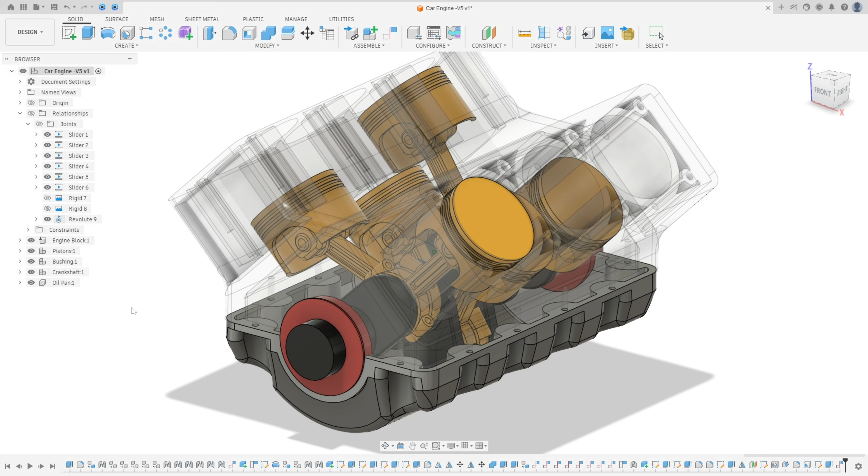Let's create one more component of the car engine series. In this tutorial, you'll learn to make the oil pan.

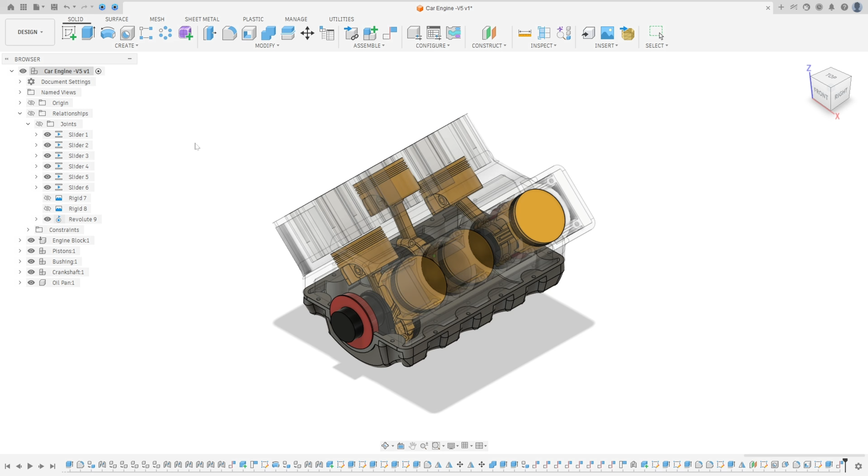The first step, go to assembly, select new component, and the parent is the car engine, and the component name is oil pan, and select activate and press OK. Hide the other components and make sure that the oil pan is activated.

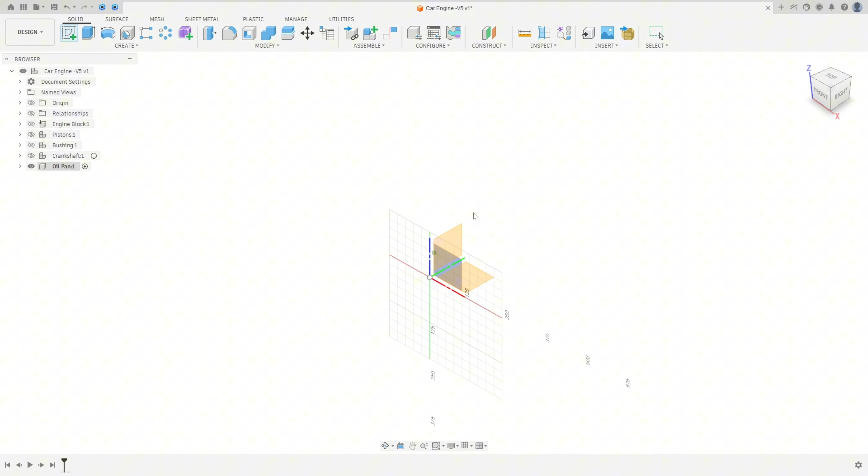Go to create a sketch, select the top plane and select the center rectangle, click here at the midpoint, make a rectangle here with 508 millimeters by 330.2 millimeters and press OK. Let me move the dimensions here a little bit and finish the sketch.

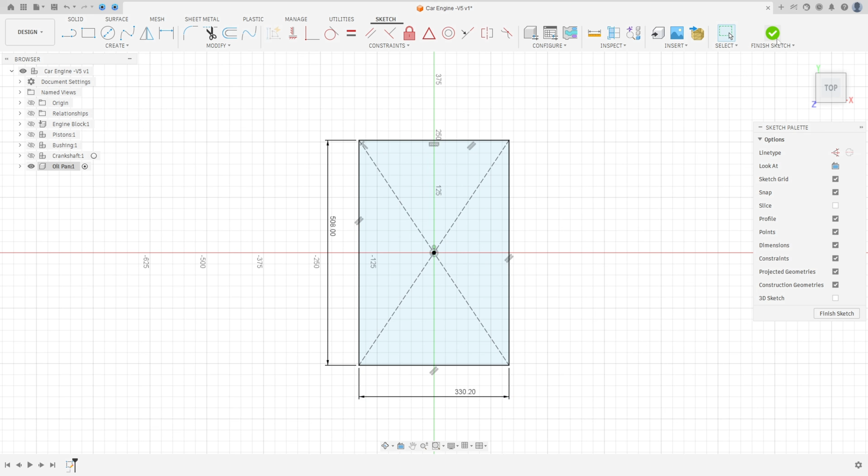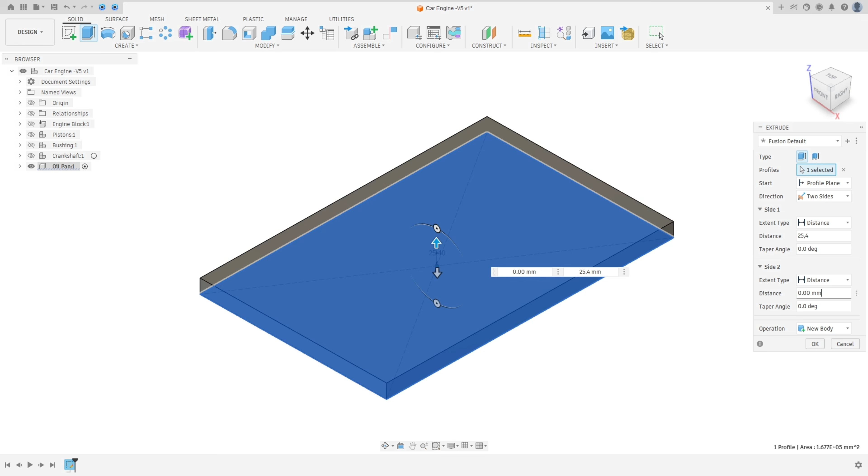Now go to extrude and select this profile, and the direction here, select two sides. Side one we will extrude 25.4 millimeters, and side two the distance will be 101.6, and we will add a taper angle of -15 degrees. Operation new body and press OK. We made this one.

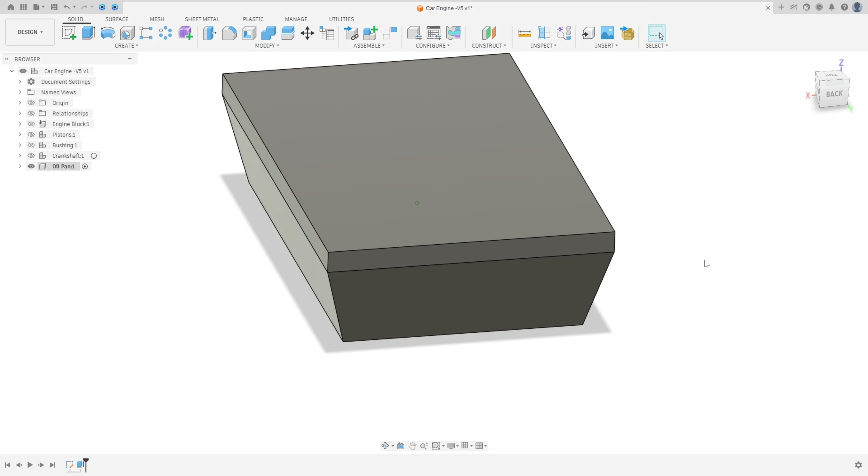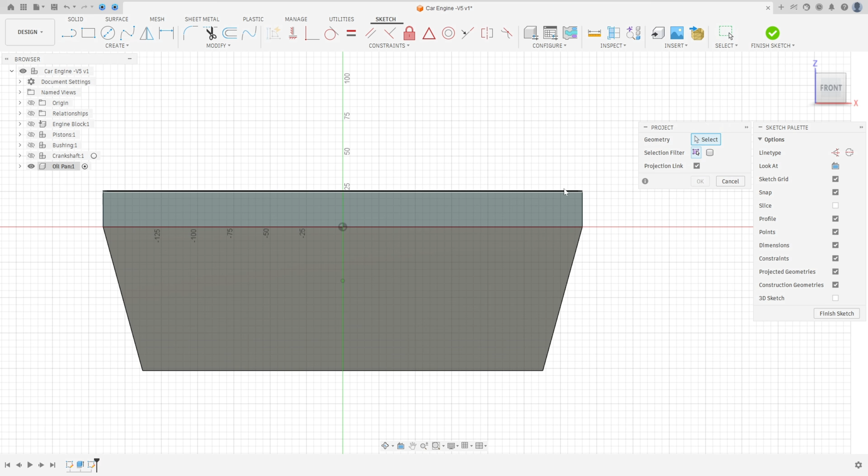Now go to create a sketch and select the front face here. Go to create and select project/include and project, or just press letter P on the keyboard. In the selection filter, select body, select this body here and press OK.

Go to create, select the arc, center point arc, and find the center of this line. Let me hide this body a little bit to show you. When you find the center, you will see this triangle here. Make an arc here with 127 millimeters of radius.

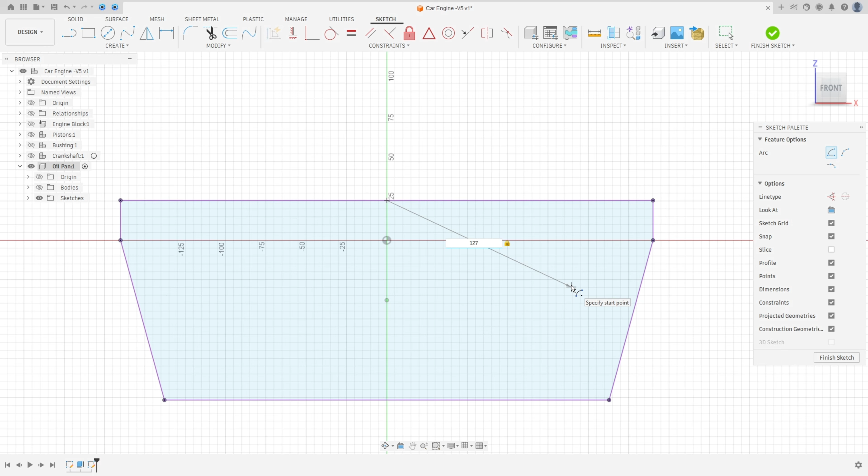Go to constraints and select horizontal/vertical. Select this point and this point here. Select line, click at this point, make a line here and make another line here. And go to sketch dimension.

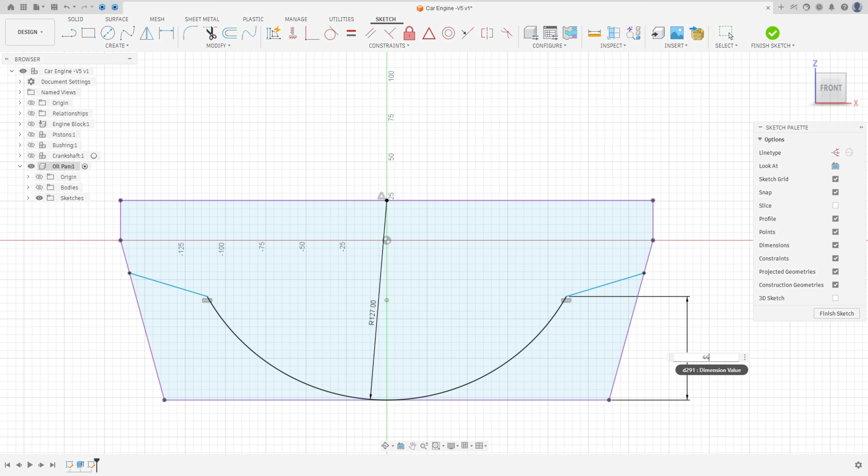The distance between this point and this line here is 44.45 millimeters. And the angle between this line here and this one is 20 degrees. Go to constraints, select equal, select this line here and this one.

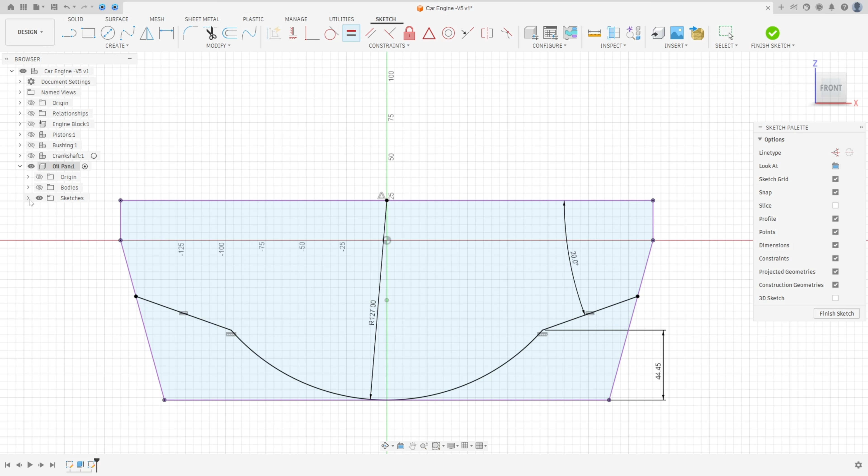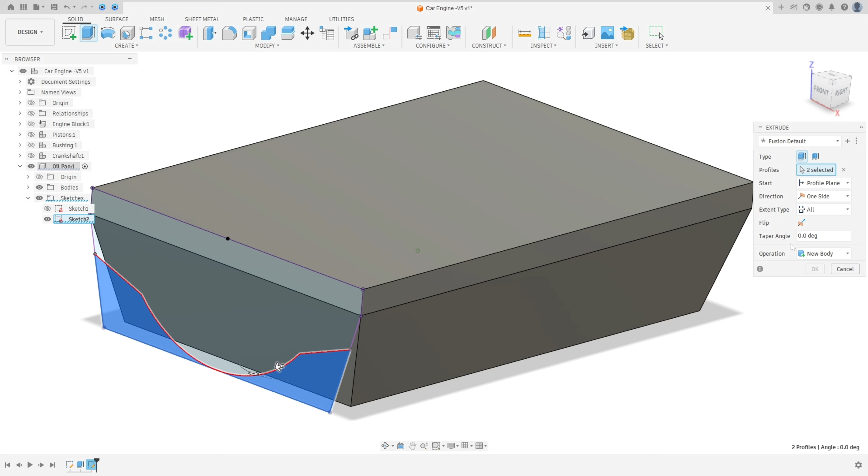Finish the sketch. Show the body here and go to extrude, select this area and this area. We use this profile to make a cut, and the extent type here, select all, flip the direction, the operation is cut, and press OK.

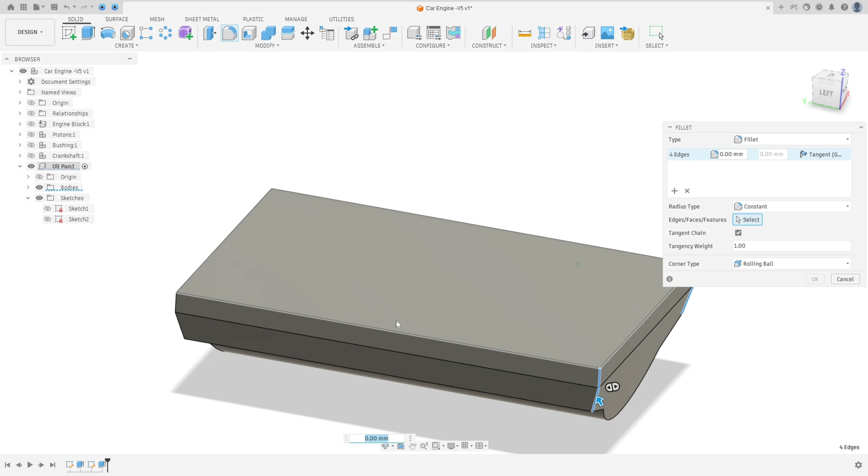Now go to fillet and select this edge here, this edge, and move this a little bit here. Select this edge here and this edge. The fillet here is 25.4 millimeters and press OK.

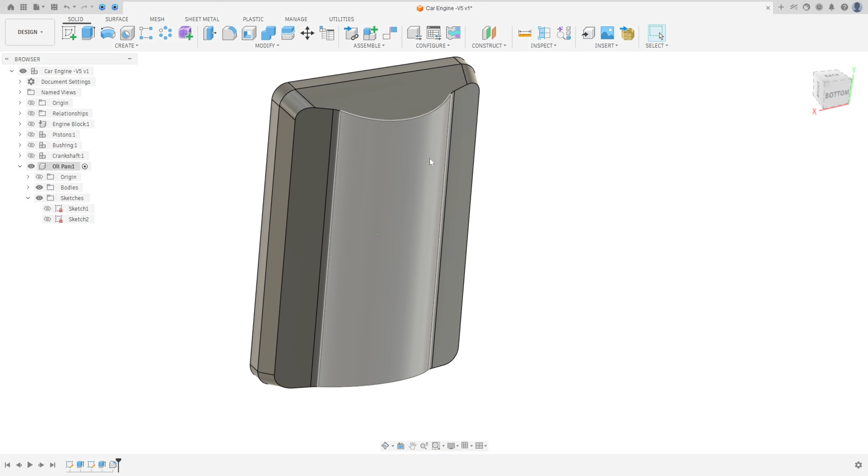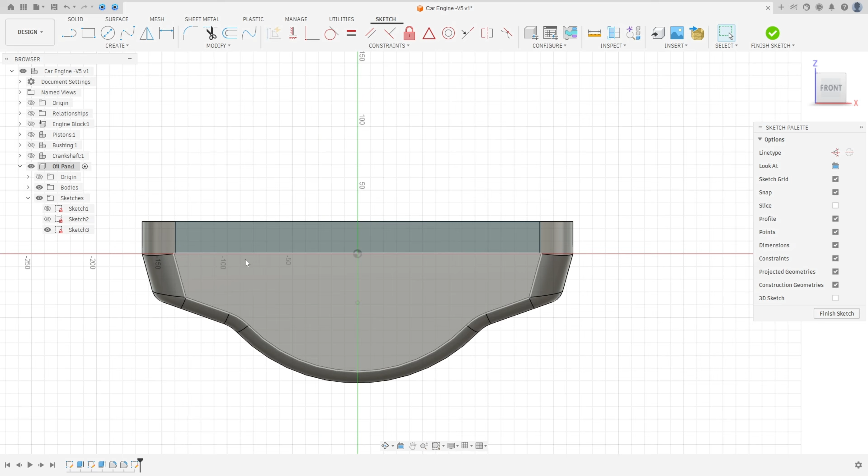Now go to fillet again and select this edge, and the fillet here is 12.7 millimeters and press OK. Now go to create a sketch again and select the front plane, and press letter P on the keyboard to make a project. Selection filter body, select this body here and press OK.

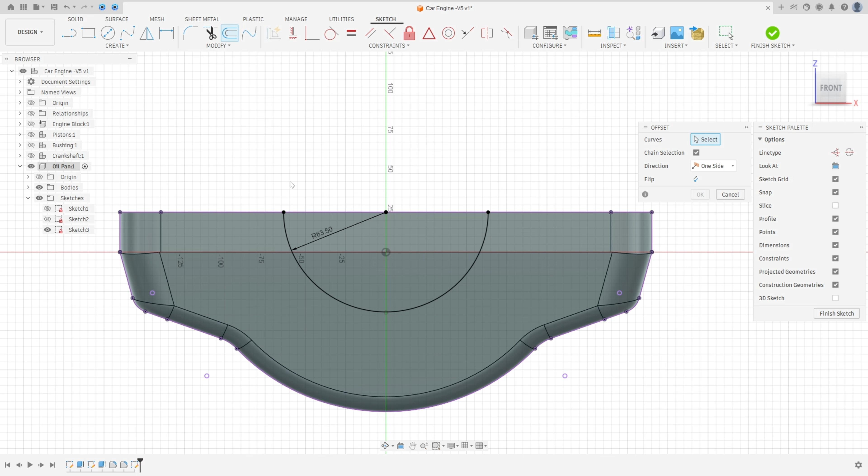Select center point arc. Click here at the center of this line. Make an arc here with 63.5 millimeters of radius, click here on this line and click on the line on the other side. Now go to modify, offset, and select this arc here. Make an offset of 12.7 millimeters and press OK.

Make sure that this point is coincident with this line or horizontal with this point, and the same for this point here, okay? So go to constraint, select horizontal/vertical, select this point and this point here. Or go to constraint, select coincident, select this point and this line here. We made this profile. The dimensions are here.

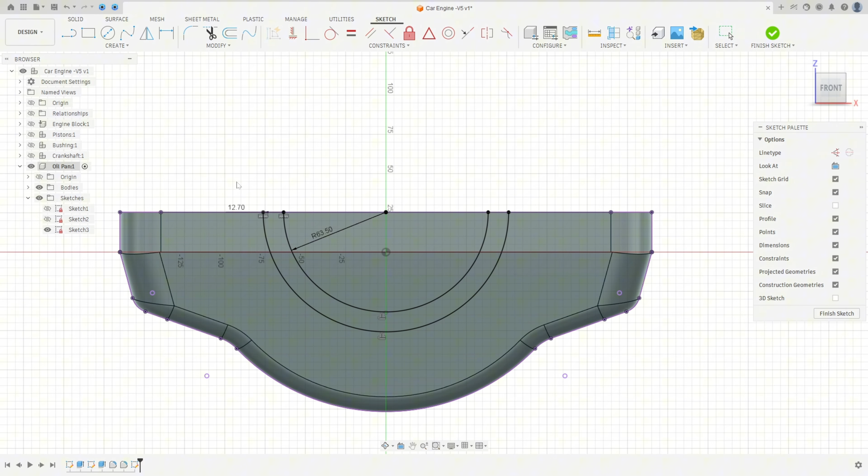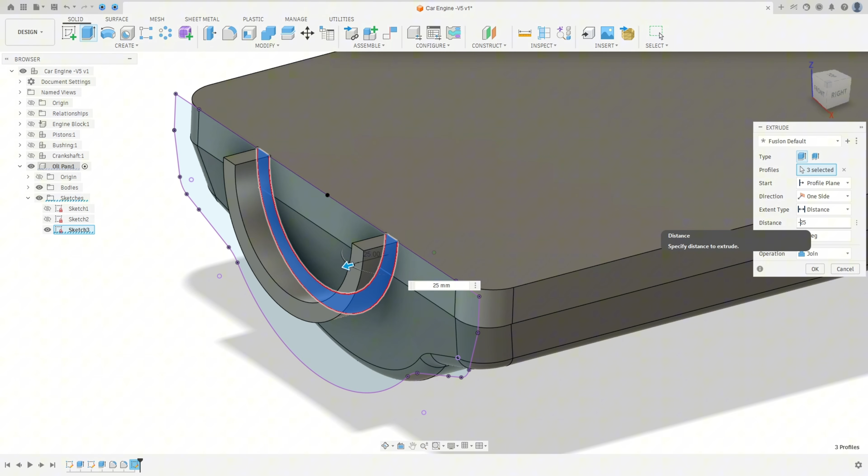Finish the sketch. Go to extrude. Here we will select this profile, and we will make an extrusion with 25 millimeters, but flip the direction, put a minus here. The operation here is join. We will create this area here. Press OK.

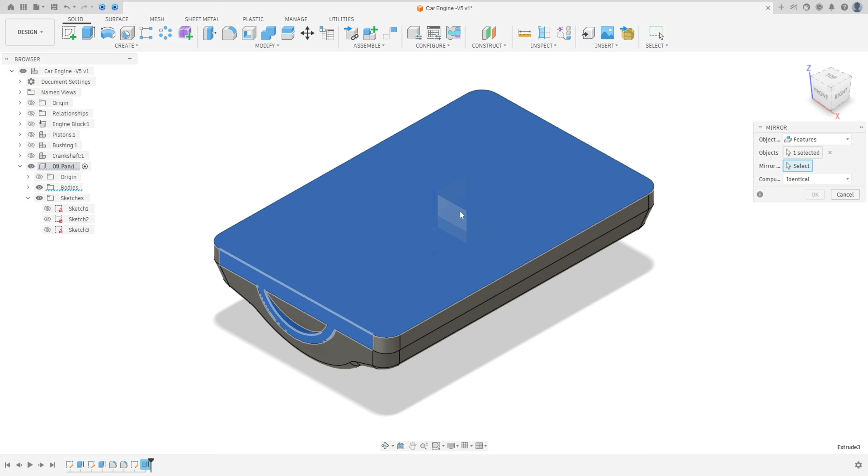Now we need to create the same on the other side. To create this, go to create and select mirror. The object type, select features. The object, select the last extrude. And the mirror plane, select the front plane. And press OK.

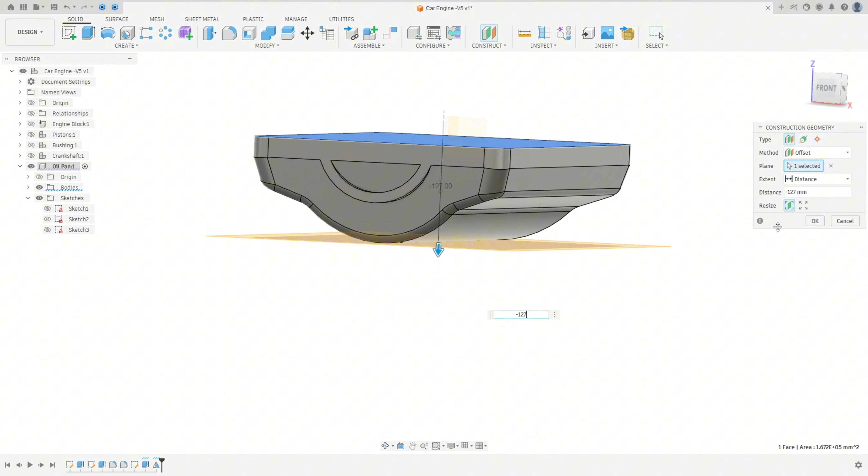And now go to construct and select offset plane. And the plane, select the top face here. And the distance is minus 127 millimeters. And press OK. And go to create a sketch. Select this new plane here to create a sketch.

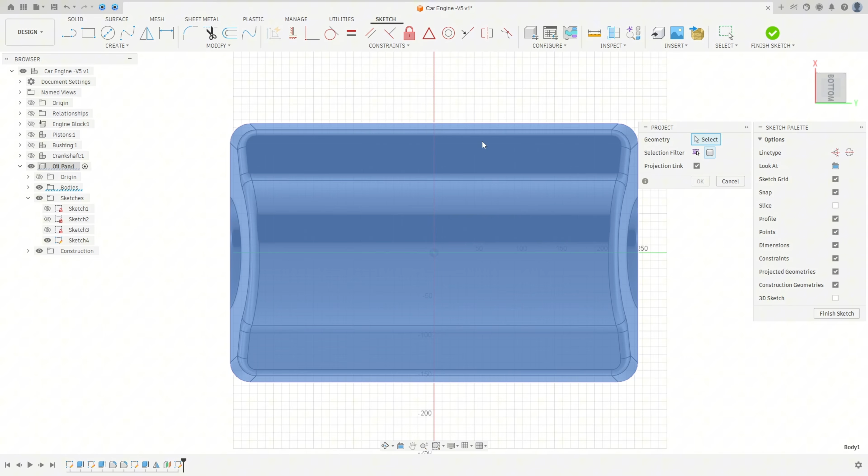I will rotate this a little bit. And here, press letter P in the keyboard. The selection filter bodies. Select this body here and press OK. I will hide this body a little bit. We have the reference here. And here go to create. Select a point. Make a point here on this side and another point here on this side. And create a point here.

And go to constraints. Select horizontal vertical. Select this point and this point here. And go to sketch dimension. The distance between this point and this line here is 10.8 millimeters. And the distance between this point and this line here is 50.33 millimeters.

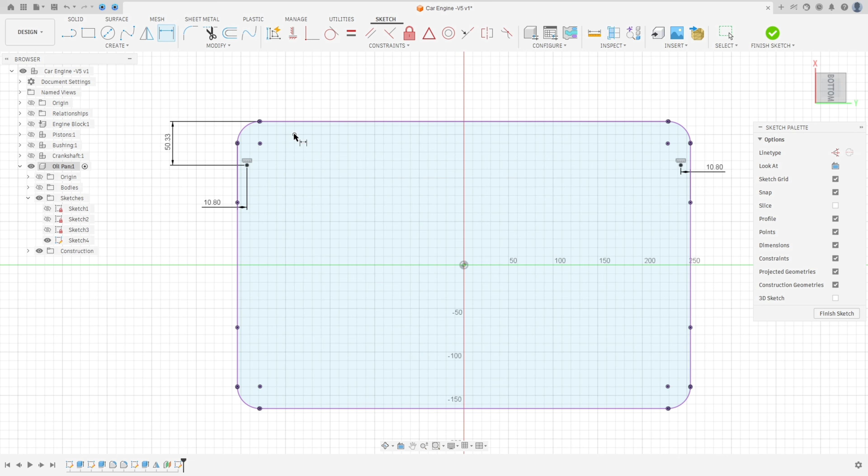And this point here, the distance between this point and this line here is 10.8 millimeters. And for this point here, select this point and this line, the distance here 101.6. And the distance between this point and this line here is 7.8 millimeters.

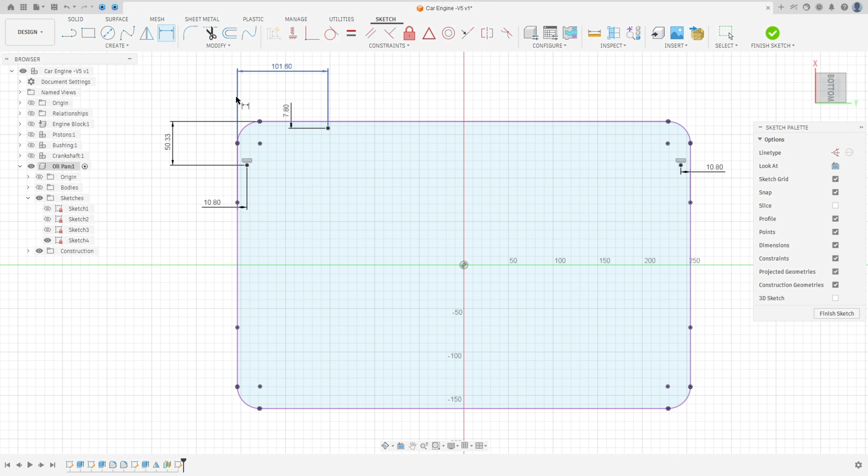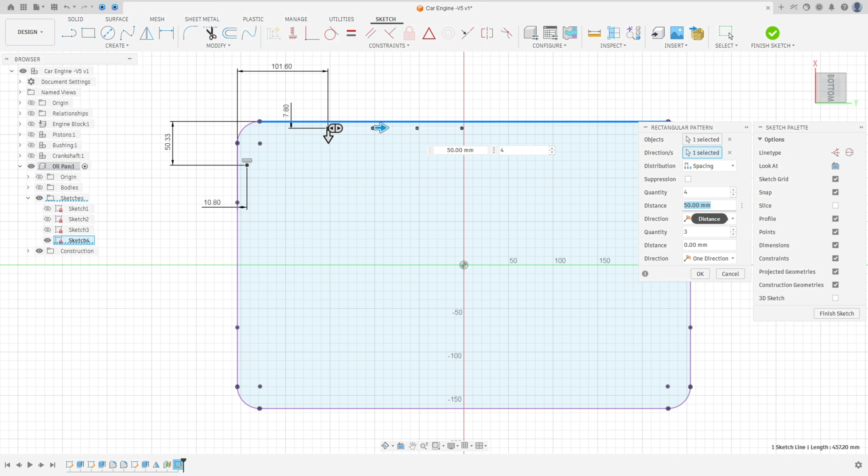And now go to create and select the rectangular pattern. Select this point. The direction, select this line here. The distribution, select spacing. Let me move this a little bit. And here the quantity is 4. And the distance between the points is 101.6. The same distance here. And press OK.

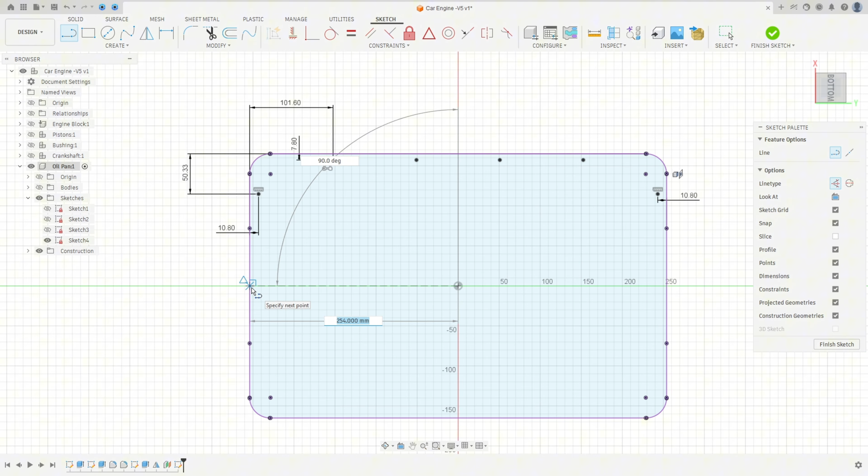And just to check this dimension, select this point and this one. The distance here must be 101.6. And now select the line, a construction line. Click here in the midpoint and make a construction line here, coincident with this line.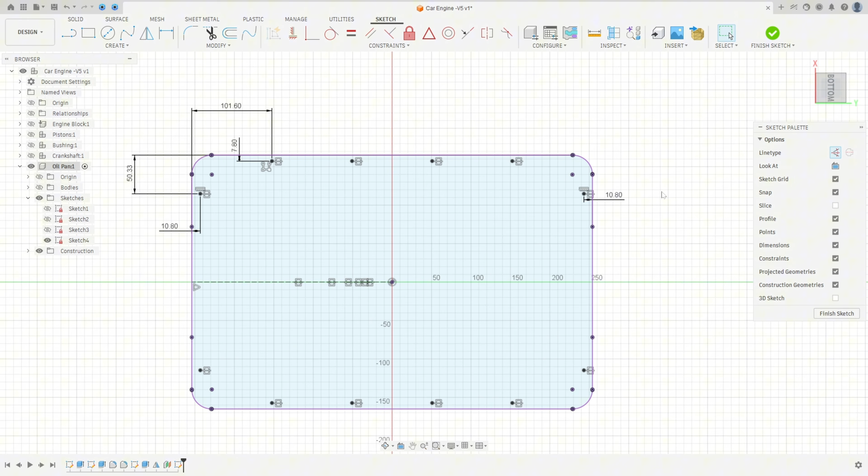And now we will mirror this point to the other side. So go to create, select mirror, select these points. And the mirror line, select this construction line and press OK. And here, finish the sketch. You can show the body here a little bit.

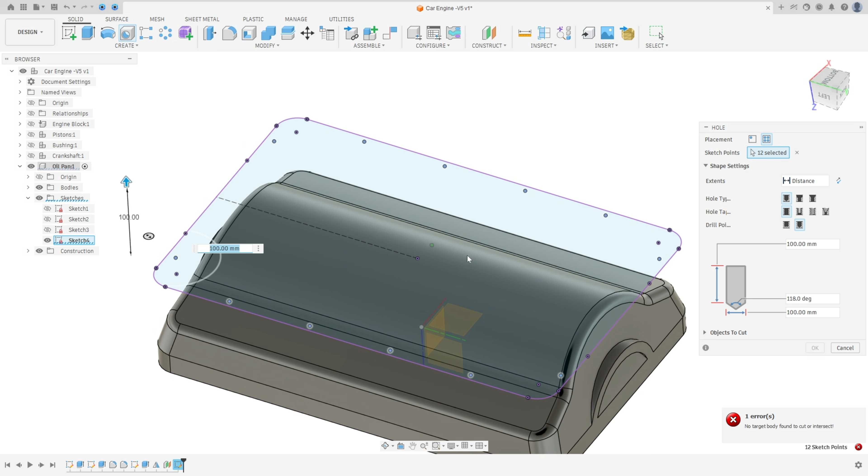And now go to hole and the placement. Select from sketch and select all these points that we made in the last sketch. And the extent here, select all. The hole type, select counterbore. The hole tap type, select simple. And the diameter here is 38.1 millimeters.

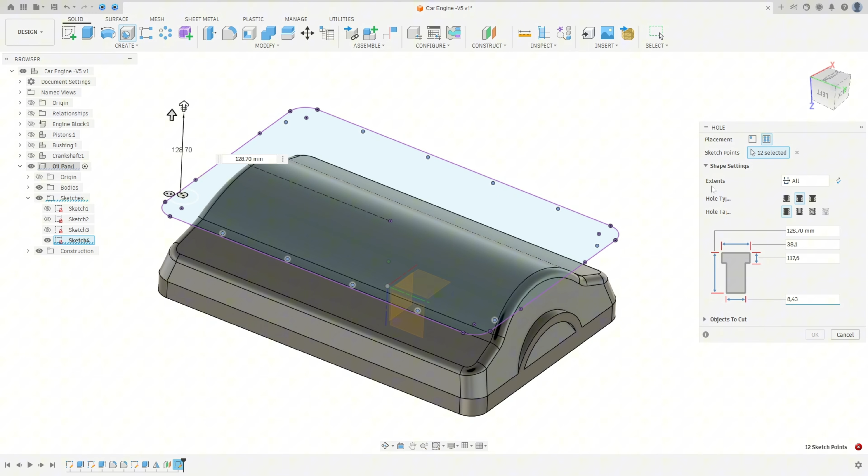And the distance here is 117.6. And the diameter here is 8.43 millimeters. It gets an error because the direction of the hole is to the other side. So click here to flip the direction. And press OK.

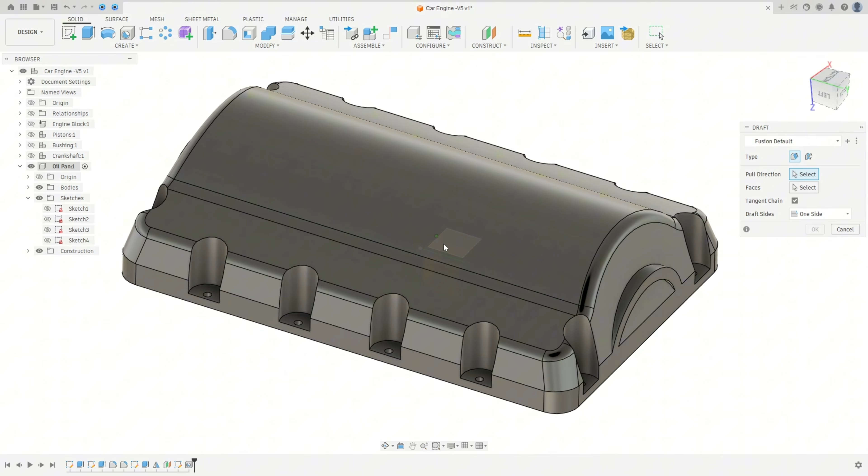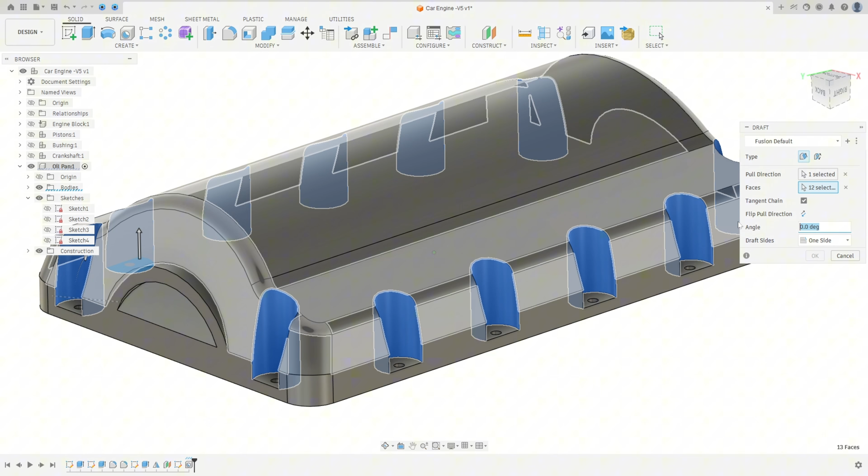And now go to modify and select draft. And here select the pull direction. Select this face here. And the faces, select this one. We will make an angle here at this face. And the angle here is 4 degrees to the outside. Okay, so it will be open here in the top. And press OK.

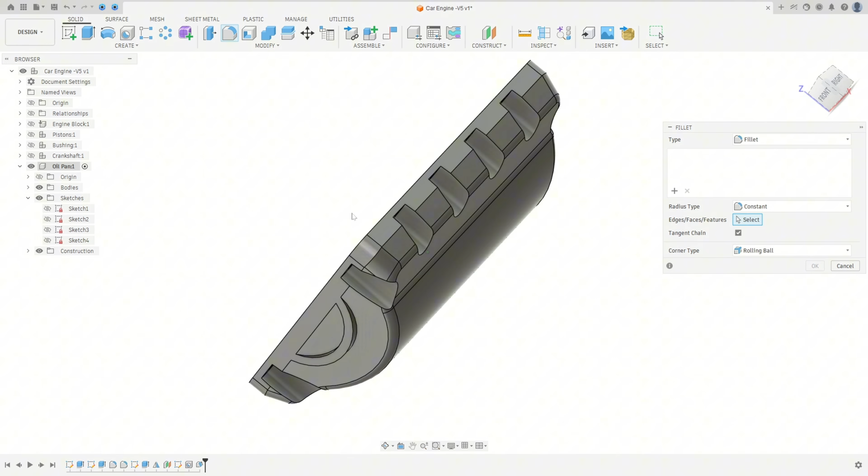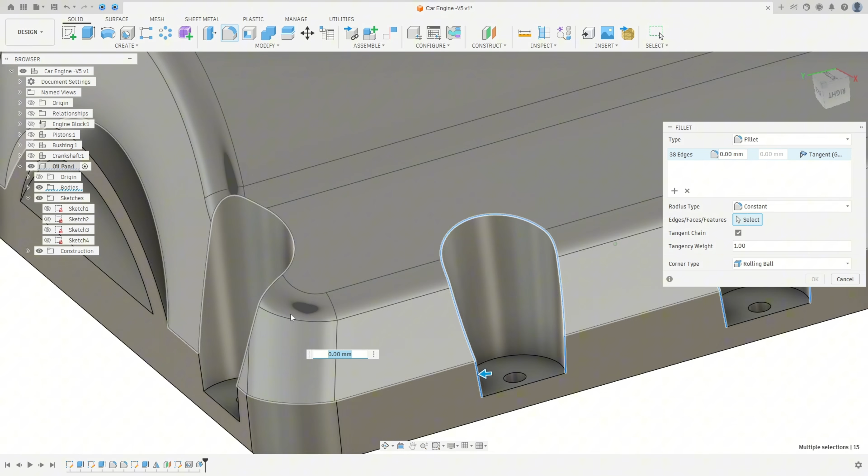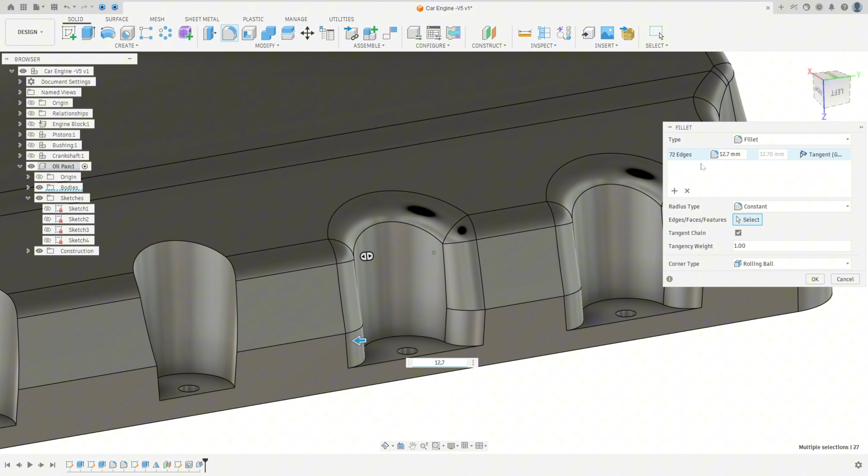And now we need to create some fillets. So to create the fillet here, go to modify, select the fillet, and rotate this a little bit. Select this edge here. Make sure to select this edge. The fillet here is 12.7 millimeters. And press OK.

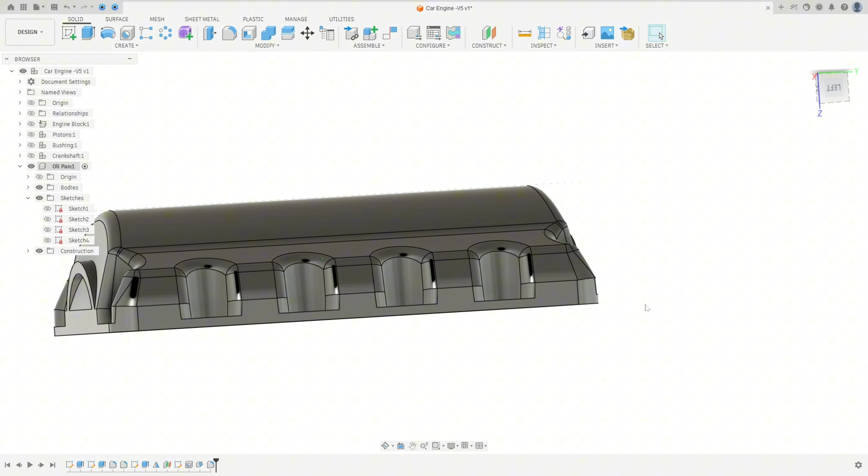And now go to modify and select shell. Select the face that we will remove, the top face. And the thickness here is 10 millimeters. And press OK. We made this one.

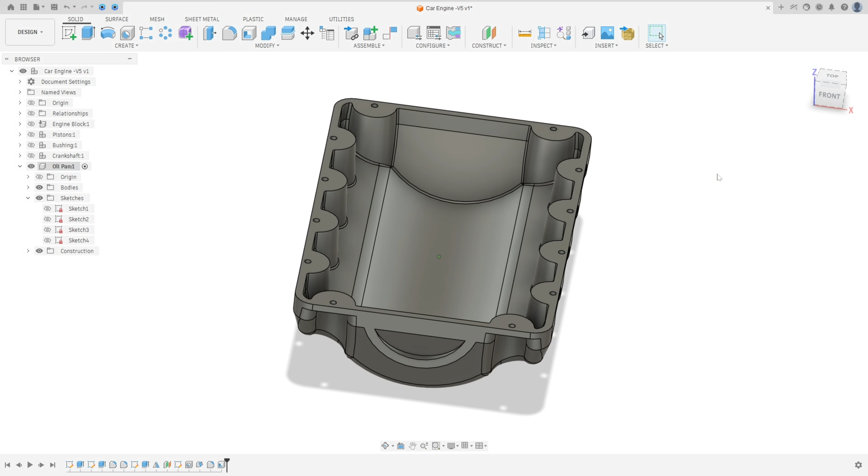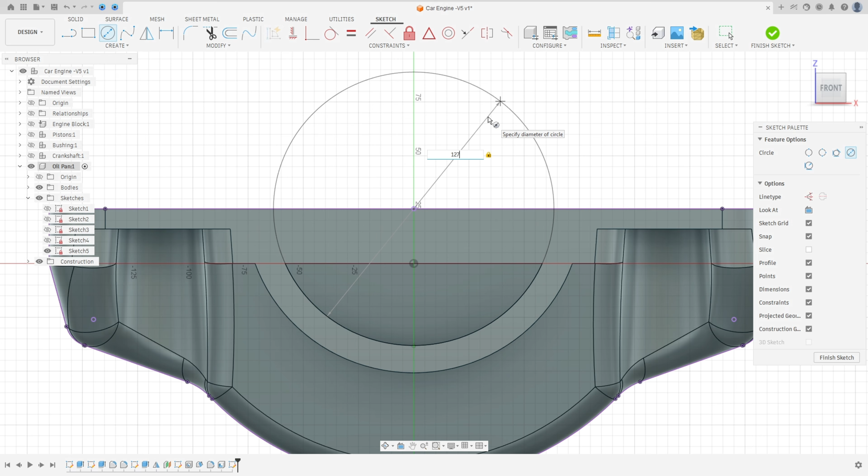And now go to create a sketch, select the front face here. And press letter P in the keyboard, select this body here and press OK. Select a circle, click here at this point, make a circle here with 127 millimeters of diameter. And finish the sketch. Go to extrude, select the circle. And the extent type, select all and flip the direction. Create a cut here. And press OK. We made this one.

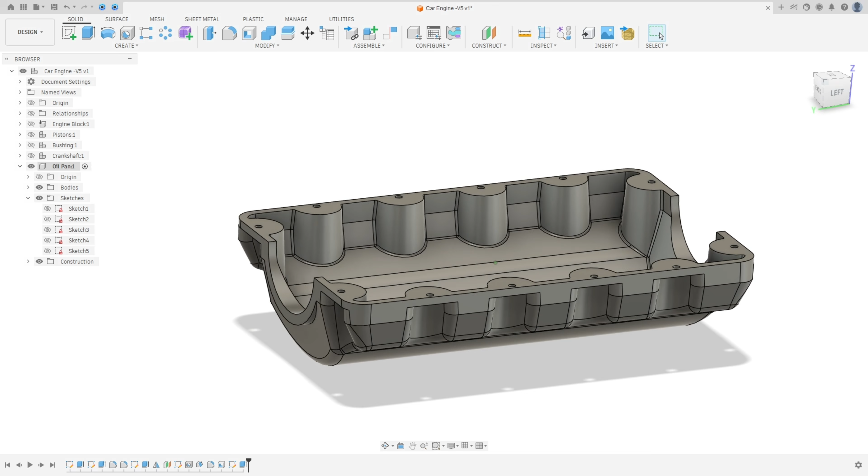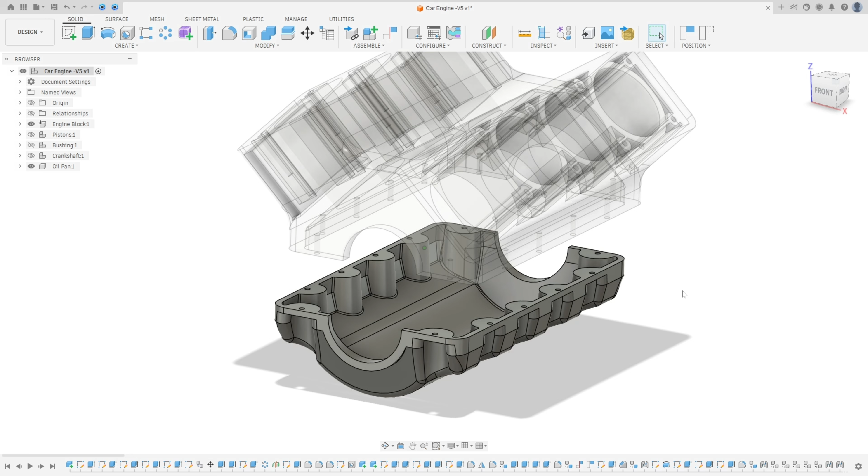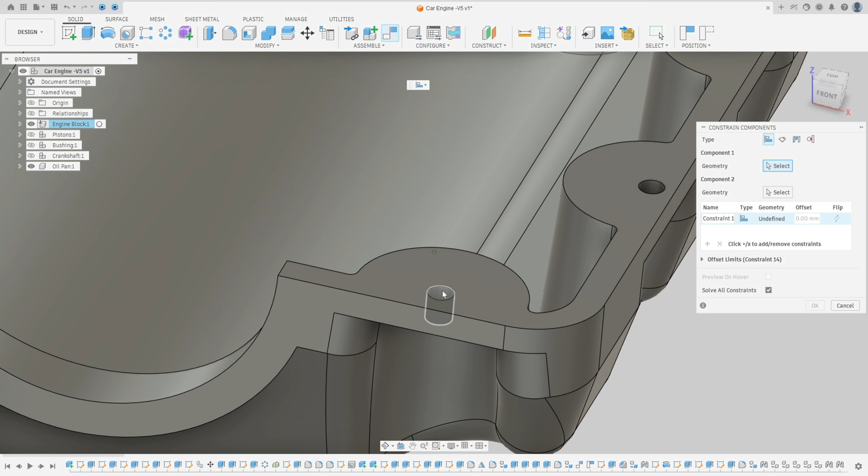And now go to activate the car engine. Show the other components. No, just show the engine block to make the assembly. You can move this a little bit here. And let me change the opacity here. And here go to assembly and select the constrain component. And here we will select this hole and select this hole here. And click in add constraints.

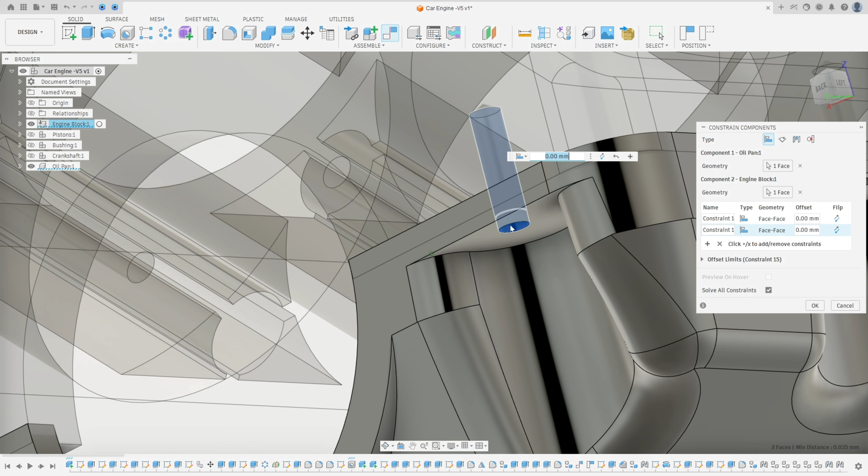And select this hole and rotate this to select this hole. Okay, it's the same hole here. And add the constraint again, select this face, and rotate this, select this face. Look that the holes are in the same place, and press OK.

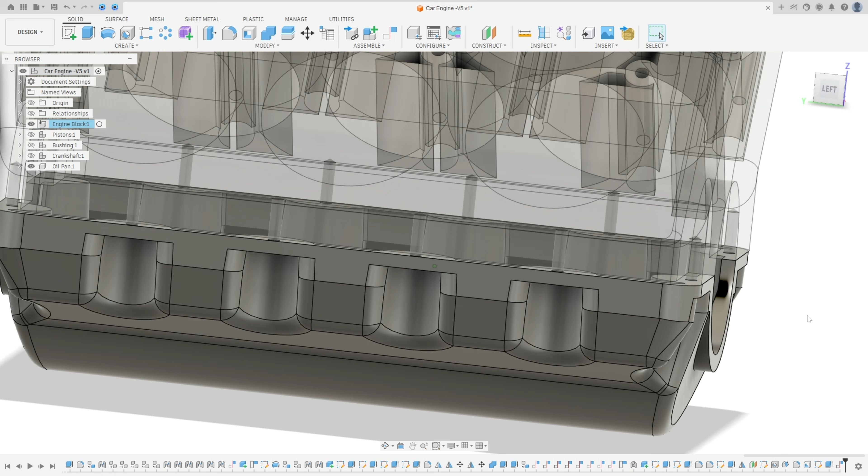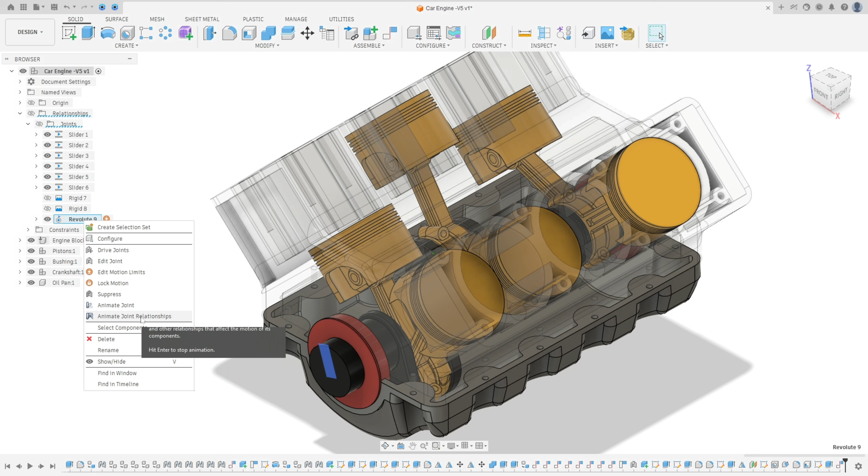And now show the other components, and to animate this, we will go to relationships, joint, and click here in Revolute 9 and animate joint relationships. So that's it. Here we finish our exercise.